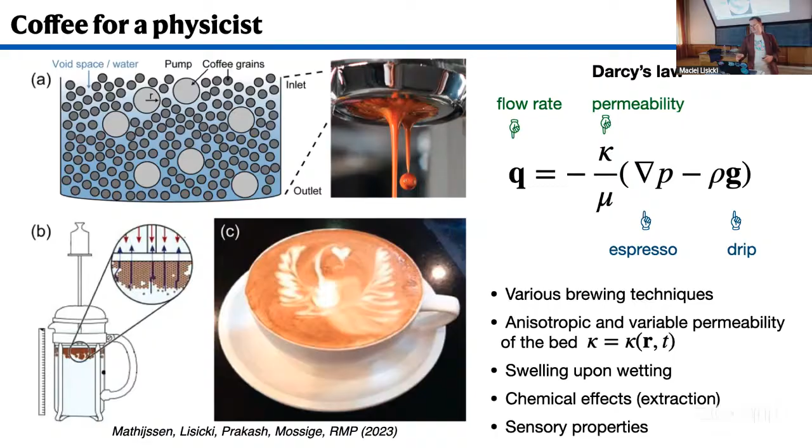What happens there chemically, that's a whole different story. But there is swelling, there are chemical effects of extraction, and that all affects the sensory properties of coffee. And the sensory properties, there's some complicated chemistry that goes into it, and I will not comment on it today. But let's restrict our attention to espresso.

So with espresso, there is a notion of a perfect espresso. How many of you are espresso drinkers? Some. So there is a notion of a perfect espresso, and the perfect espresso is a coffee that is sweet, but not too bitter, but not too sour. So there is a balance between sour and bitter, and this depends on many things, but in particular, it depends on how long you brew it.

Typically, if you brew your espresso for 20 to 30 seconds, you get something that could be called the perfect espresso, just sweet enough. Now, if you brew it for too long, you start extracting different chemicals, and that gives it a bitter or an ashy taste, and that's called an over-extracted espresso. Or if you brew it for not long enough, typically less than 20 seconds, then you have something that's under-extracted, so it has these vegetal or sour notes. So we don't want either, we want to brew it for just the right time.

Now, how do we make it so that it brews over 20 or 30 seconds? Well, to brew coffee, you need essentially 3 elements. You need coffee, your material, you need a grinder, and you need an espresso machine. And so this is a set that's necessary to brew decent espresso.

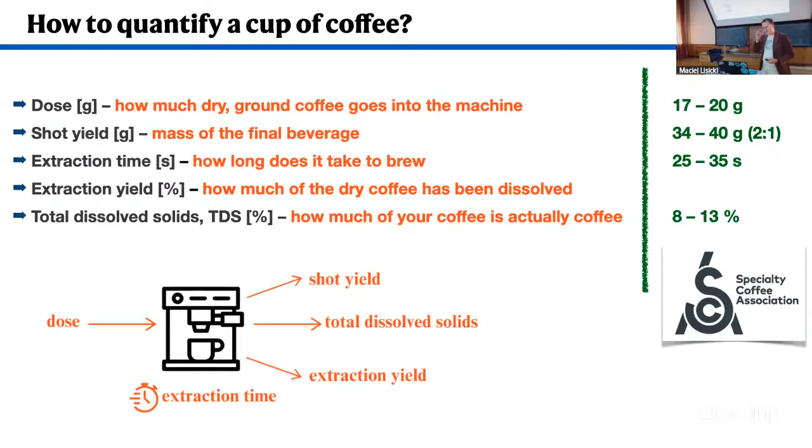Now, another factor is the extraction yield, so how much of the dry coffee has been dissolved in this coffee pot. And another parameter is TDS, total dissolved solids. So how much of your coffee is actually coffee? The amount of coffee in coffee, and that's typically 8 to 13%. So these are the metrics that the coffee industry uses to characterize a cup of coffee.

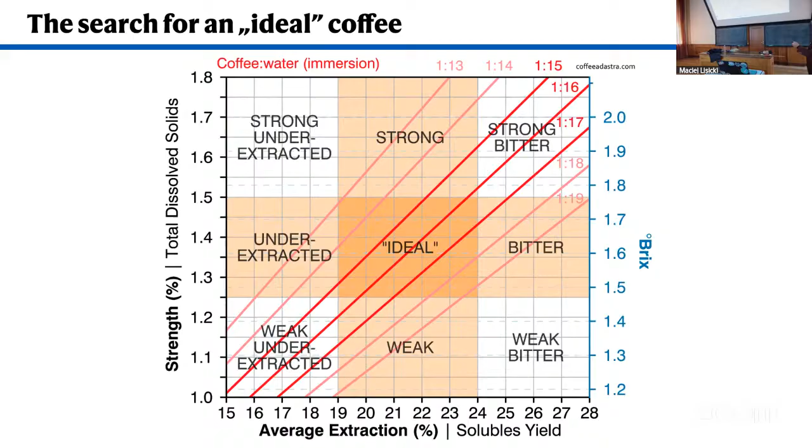Now, if you look at the diagram of TDS, which quantifies the strength of coffee, with the average extraction, so how much of the soluble substances you actually dissolve, there is a sweet spot in the middle between under- and over-extracted, between too strong and too weak. So people are generally aiming to be in that area.

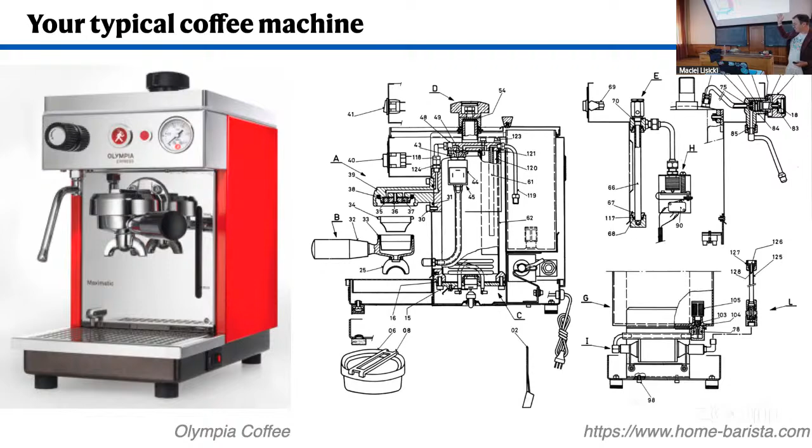And of course, this world of coffee is very much for nerds. So there is all sorts of equipment you can buy. You can buy everything made of gold and pay however much you want to pay for that. But a typical coffee machine, in fact, is not a very complicated design. Of course, this looks complicated as a technical solution, but what it boils down to is the following. So this is the coffee machine we have in our lab.

Well, it's connected to a water supply. The water goes through a rotary pump. This pump is connected to a pressure regulator. Now we have a pressure sensor connected to it. Then water goes through this flow meter. Then it goes through a boiler. A boiler is basically a big tank of water that is pressurized. It's held at about 120 degrees Celsius.

So the water that makes your coffee goes through this boiler, gets in thermal contact with this water and heats up to about 96 degrees Celsius, and then it ends up in this device called portafilter, and then it ends up in the cup. And underneath the cup we have scales, and all the data from these three we measure simultaneously using this computer and the tiny Arduino that's the scale. So this is a very simple experimental setup that we have. And so let's brew.

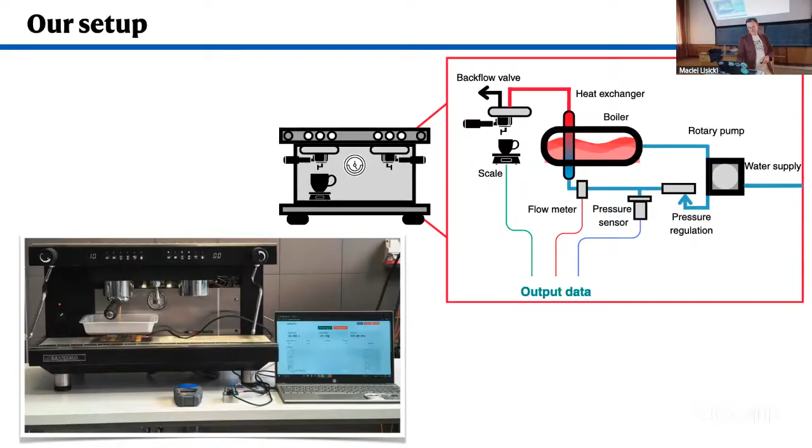Well, this is an actual photo from our lab. And the typical experiment looks something like that. Maybe you can't see that very well. So panel A is mass in the cup versus time. Initially there is very little flow. First of all, we have droplets of coffee, so the mass increases slowly. Then there is a crossover, and it starts increasing more rapidly.

Now, if you translate the mass to flow rate, which is essentially a time derivative of the mass in the cup, you'll see that initially the flow rate is small, then it increases, but then interestingly it saturates. This increase happens over about 30 seconds, and then later on it is saturated. And the pressure signal in the machine, in this case, was 6 bars, and this was consistent throughout an experiment. So what we see here, in fact, are two regions.

First is the short time regime when water infiltrates the puck. Initially the puck is coffee mixed with air. So this water has to displace the air from the porous medium and starts dissolving the coffee. So there is infiltration, there is swelling, there is displacement of air. Then finally, when there's water in contact with the coffee, there is dissolution, and finally espresso starts flowing. So this is quite a complicated regime with lots of things happening. It's a multi-phase flow, multi-scale. It's a horror to model, really.

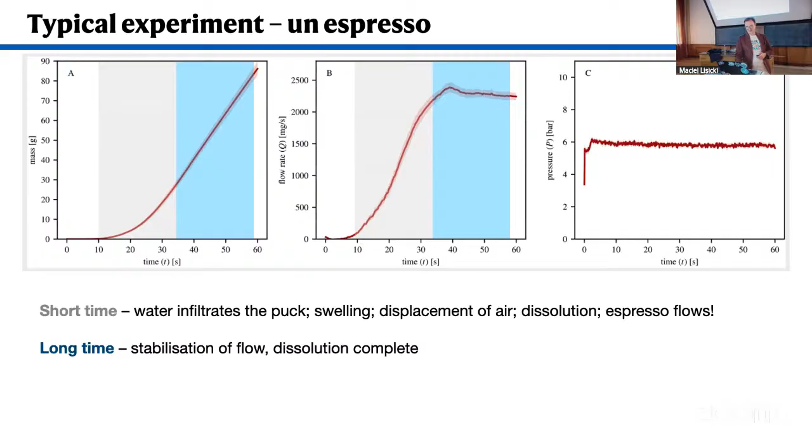So let's see. One more thing that we did is we wanted to characterize the dissolution. We wanted to understand how this material is being dissolved. So what we did, we divided a couple of coffees, about 70, that we brewed for this experiment. Every 5 seconds, we would change the cup to which the coffee is flowing. It's a horrible experiment because you have to have 12 cups, and every 5 seconds you switch the cup. And then we measured TDS, the amount of coffee in every sample within an experiment.

How do you measure the amount of coffee in coffee? Well, the brute force method is to just dry out the liquid and check what is the mass of the grains. But what you can do is an indirect method where you measure the index of refraction. With this refractometer, the index of refraction is proportional to the TDS, so you can measure TDS by optical measurements.

And so what we see is that the TDS changes in time like this. Initially we have very concentrated coffee. The first drops of coffee, and you can see that in the machine, are very dense, very dark. As you wait, this intensity decreases. And finally, after the 40th second, you dissolve very little. The mass of coffee in coffee is negligible here.

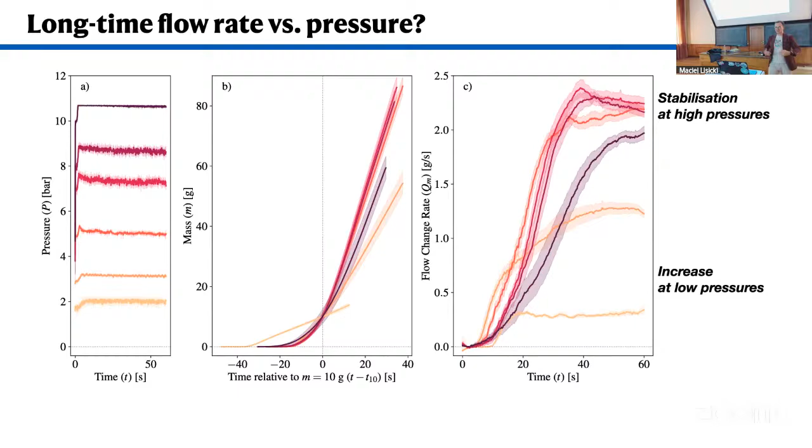But then if you increase the pressure even more to like 12 bars or 11 bars, then you get this curve. The final flow rate is actually low, which is surprising because we would expect from Darcy's law that the higher the pressure gradient, the larger the flow. So there's something interesting going on here.

In fact, if you measure this saturation flow rate for different pressures, you find that at low pressures it increases, but then at pressures of about 6 bars it saturates, and maybe even goes down a little if you increase the pressure. This was the first moment where we thought there's something interesting, because there's definitely not Darcy-like behavior. The linearity is maybe there for low pressures, but definitely not at high pressure.

At the same time, you often see advertisements of coffee machines that say this machine is capable of producing 20 bars, 25 bars. So is it true that the higher the pressure, the better the coffee machine? Well, this shows something different, that at some point the pressure stabilizes the flow rate. The conjecture is that at low pressures maybe we see a Darcy-like flow, but at high pressures we see the saturation. This is something we wanted to explain. One idea we had is that coffee is in fact a porous medium that is not only porous, but elastic as well.

So what I mean by that is that if you induce a pressure gradient in coffee, in this porous coffee medium, well, then the pressure gradient will induce stresses. The stress will cause deformation. So stress will cause strain, and this deformation will change the porosity of the sample, so how many pore spaces are within this ground coffee. Now, this porosity affects permeability, the material characteristic of how permeable the material is to flow. And so this in turn will affect the flow rate.

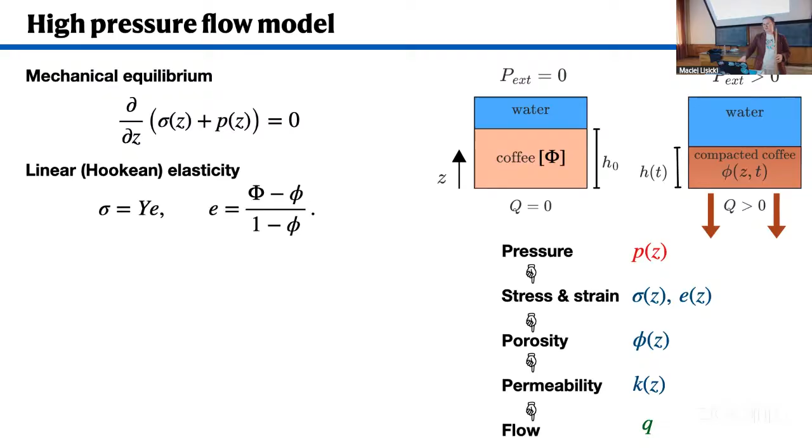So writing the equations of mechanical equilibrium, a well-known concept from the theory of elasticity: under a stable pressure gradient, this compacted coffee is in equilibrium. Then assuming that stress and strain are related by a linear relationship, where Y is the effective Young's modulus of the coffee. Then we need to relate the strain, so the deformation, with the porosity. And this is the relationship that relates them.

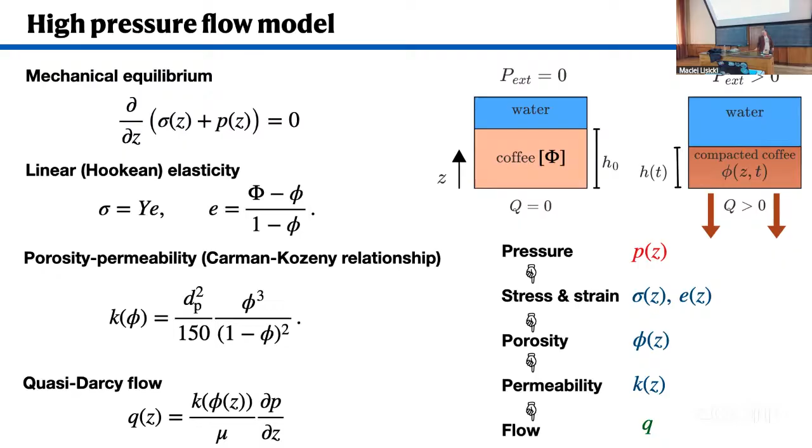Now the porosity is related to permeability by the Kozeny-Carman relationship, another empirical relationship that people use to describe porous media. And finally, the flow rate is related to permeability and the pressure gradient by Darcy's law, but this Darcy law now has a permeability that depends on the porosity, that depends on the deformation, that depends on the pressure. So the flow is proportional to the pressure gradient, but also to something that depends on pressure in a non-trivial way. Okay, and so this model can be solved.

Exactly. And if we get a model, we can compare the model with our experiments. This is what the model predicts: for low pressures, we have an almost Darcy-like, almost linear increase in the flow rate, but at higher pressures of about 6 bars, the flow stabilizes.

So this leads us to the conclusion that perhaps we understand what's going on here: at low pressures, when the pressure gradient is not too high, this porous medium behaves like a Darcy medium, but at higher pressures, compaction happens, and the high pressure is compressing the pores and decreases the permeability. Now, this is all in the long-time regime, when everything that we could dissolve is already dissolved.

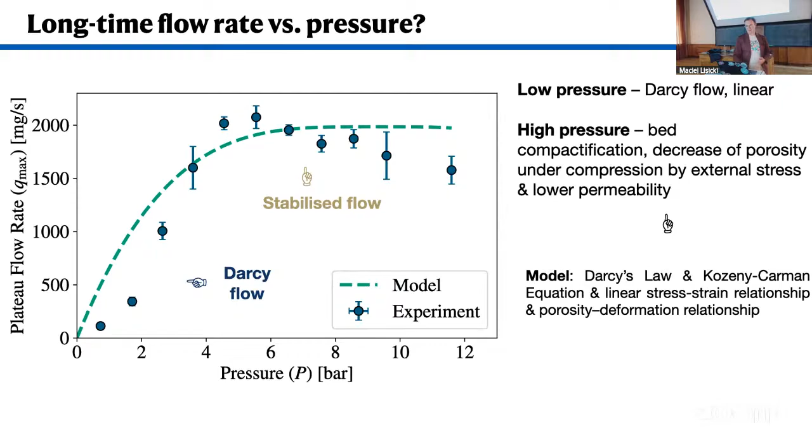In the short-time regime, it's more complicated because at the same time we have dissolution, which removes material from the coffee, so it opens the pore spaces, and this compaction, which closes them. So there is a competition that goes on during dissolution, and this competition leads to structural changes in the coffee puck.

In coffee, this phenomenon is known as channeling. And channeling is really bad for the coffee, because you get the flow rate that you would expect, but the dissolution is very low, because most of the fluid doesn't dissolve the coffee but instead goes through these channels. So in the case of coffee, how can you see this channeling?

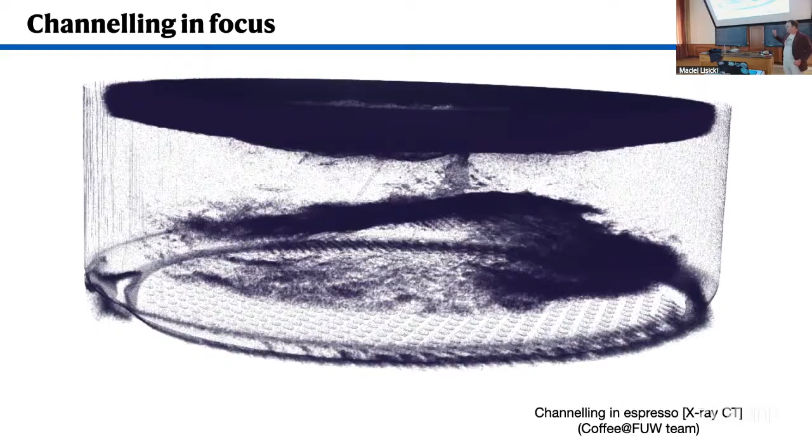What we did is we took a coffee puck after brewing and put it in a CT machine. So we did X-ray imaging of this coffee puck, thanks to the fact that in the physics department we now have a CT machine. This was, I think, the first photo in the world of a coffee puck in a CT machine. White areas are where coffee is, and dark areas are where the pore spaces are. There's a 3D reconstruction here. So this coffee has definitely channeled.

This is already after brewing, so this is empty space. So what happened here is water found this channel here, and it spread over the coffee puck. And then finally, well, it seeped through the bottom part of the coffee cake. So this is an example of what is undesirable in coffee.

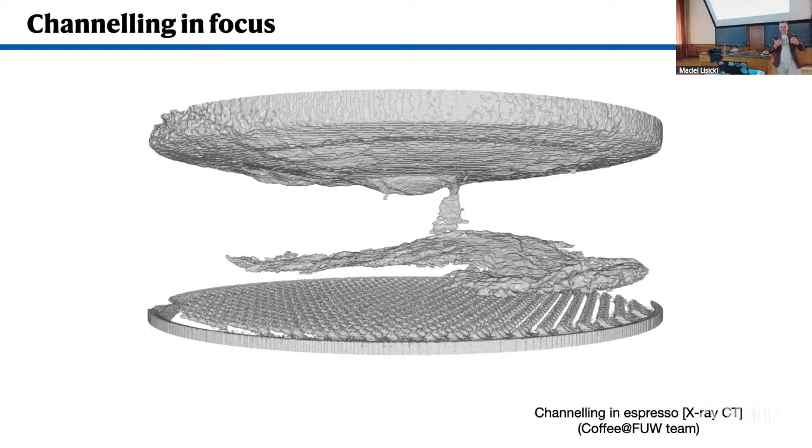We want to avoid it, and the way to avoid it is to make your sample as homogeneous as possible, because every irregularity, every change in porosity, every distribution of porosity might lead to the formation of channels. And that's why we pay so much attention to homogenizing, mixing, and shaking this coffee bed before we make the coffee, so that this doesn't happen.

Another way, well, now that we know that this channeling happened, we wanted to understand how does the coffee, this porous medium, move, or what happens during the brewing process. And it's hard to look into it because it's closed in a metal box during brewing. Metal boxes don't really image well with X-rays.

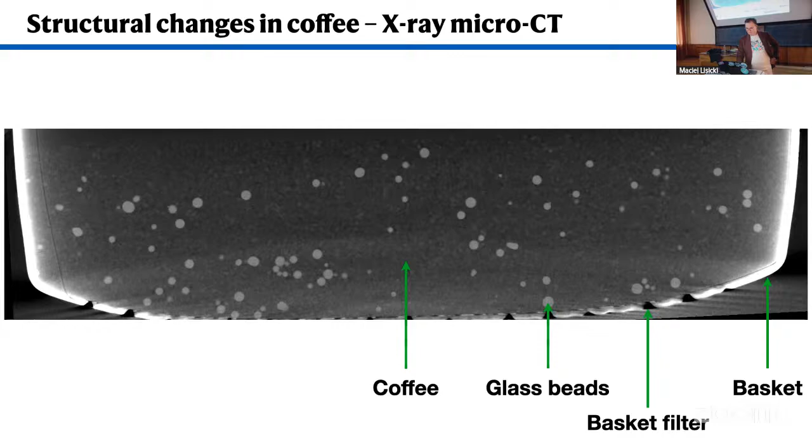So what we did is we did the before and after, but we added some tiny glass beads of the size of about 50 to 70 microns. So we added these glass beads to coffee, and so this is X-ray microcomputed tomography before brewing. So we note the positions of these glass beads, and then this is after.

So what you see here is that after brewing, there's different contrasts, but essentially after brewing, there are these cracks that appear, and these cracks cause the sample to be less homogeneous. Now, what we want to do, and what we are in the process of doing, we have three-dimensional images of before and after, and we know where the glass beads are.

So now the job is to correlate the positions before and after, so that we get a displacement field, and we know which parts moved during brewing and in what way. And so this is one of the works in progress in our lab. But this shows us another thing.

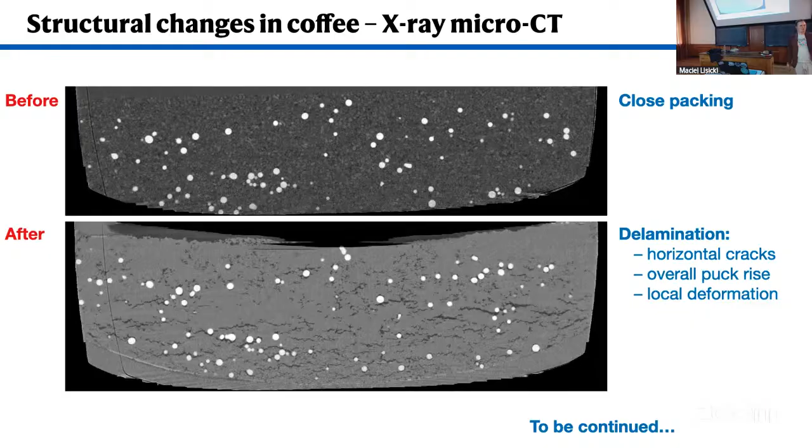So if this is before and this is after, maybe you have this experience of making coffee in a coffee machine where you turn the machine on, you start brewing, then you turn it off, and then you decide, no, maybe you want a bit more water. So then you turn it on again. So if you do this repeatedly, this is what happens.

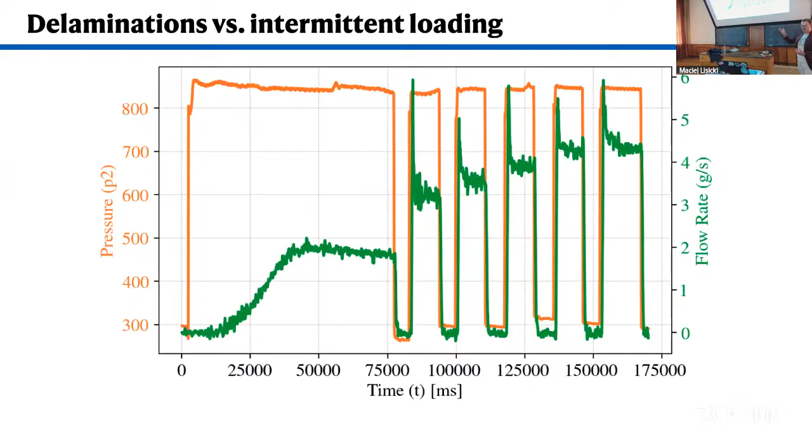Okay, well, perhaps you are not fans of espresso. Maybe someone likes a moka pot coffee. How many people like it this way? Okay, there's some fans. Well, what can you do with a moka pot?

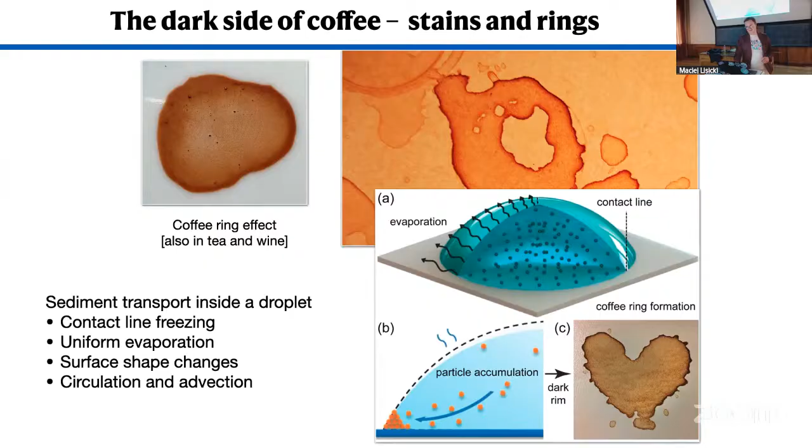Okay, and this brings me to a slightly wider topic of gastrophysics. So all the fluid mechanics that's related to food, which is something I find very interesting. And the result of the pandemic for me and my 3 colleagues was that we wrote a review paper on culinary fluid mechanics and other currents in food science. And because it was a pandemic and we had too much time, it grew uncontrollably to over 80 pages and 1,000 references. So we put a lot of time into it, but at the same time, it was very much fun. And so if you're interested in the fluid mechanics of food, check it out.

We structured it like a menu. So as with a nice dinner, you start off with kitchen sink fundamentals. So all the rules of fluid mechanics and all the laws that we might need to understand what's going on. Then we start with a drink or a cocktail, which is an excuse to talk about multiphase flows.

And once we've had a couple of cocktails, there comes a soup starter. And soups are typically complex fluids, so not all soups flow like water. They might have more complex internal structure. They might have polymers, which make them respond in a nonlinear way to forcing. So we talk about complex fluids. Then it's time for a hot main course, where we discuss thermal effects, which always have pronounced and lasting consequences for kitchen flows.

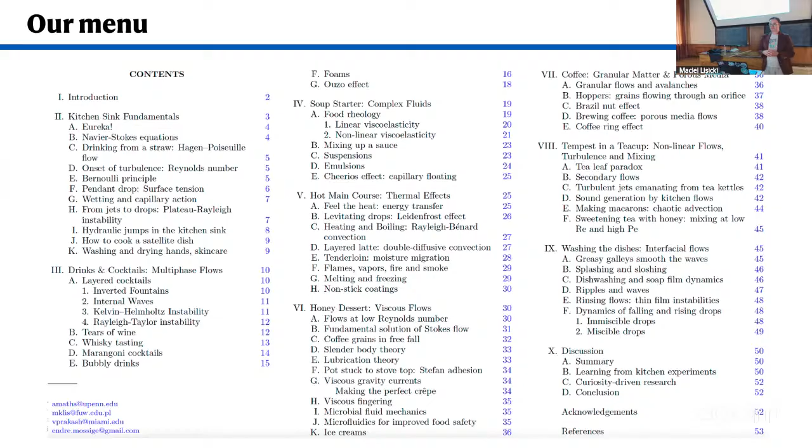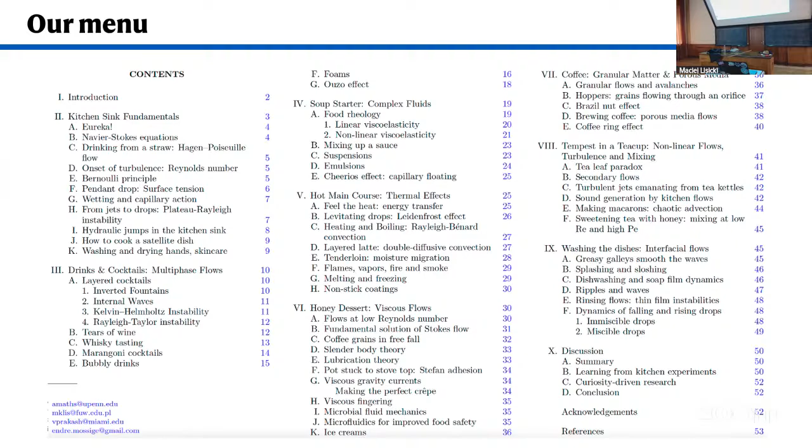And after the main course, it's time for a dessert, and desserts are often viscous, like honey. So we talk about flows at low Reynolds number, and how such flows can be used to understand the fluid mechanics of sweet desserts. Then we talk about granular matter and porous media flows using coffee as an excuse. Of course, if coffee is not your thing, then maybe you're fans of tea, and tea is related to turbulence mixing.

And after that, someone has to do the dishes, but maybe it's not that bad, because then we talk about interfacial flows and what happens when surface tension enters the game.

And so all of that would not be possible without a wonderful team of people. So in particular on the coffee project, the team of Rados, Pranek, Marysia, and Łukasz. These are all students in my lab, as well as colleagues from the physics department, Michał and Piotr. And now this paper that summarizes our findings is in print in Physics of Fluids, so it will be out very soon, but the preprint is already on arXiv.

And again, it would not be possible to fund all that without our industrial partners, Coffee Lab, a Warsaw coffee roastery, and the Polish company Coffee Machine Sale, who distribute coffee equipment; these things tend to be rather pricey. And the National Center of Science is not keen on financing these initiatives yet, but maybe soon, once we have some papers published, we will ask for

further support. Now, it might sound funny, but in fact, this coffee business is an excuse to talk about rather complex flow phenomena. And there's a couple of questions that emerged from this study that are really serious scientific questions about the nature of multiphase flows that incorporate both dissolution and structural changes in fluids. And these are more prevalent than only in coffee.

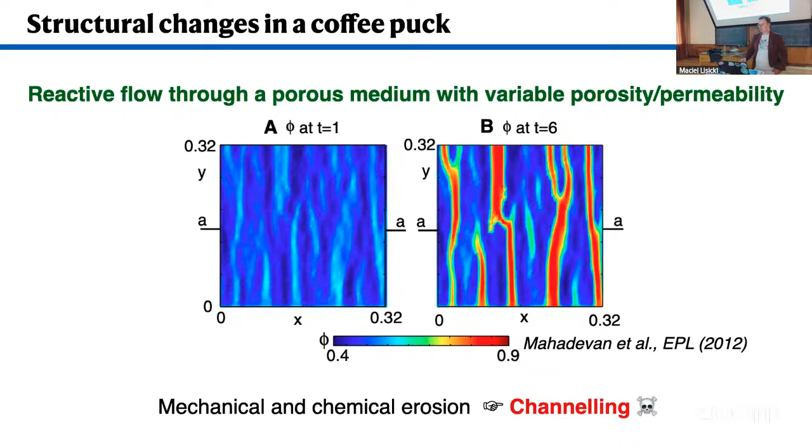Now, this is just for one pressure. I would love to have that for multiple pressures. I don't have these measurements yet. If I find interested people, we'll do it. But I think we brewed something like about 300 coffees to have the measurements that went into this paper.

And it happened during one session, or no, during multiple sessions. So as with many scientific research adventures, we were learning on the way how to make it better and better. And so when we finally learned how to use our coffee machine and how to make the measurements, this took just maybe 3 days to measure everything. But it took us 2 years to figure out how to do it. I mean, it was not our main project, but

it received intermittent attention. But yeah, so the amount of coffee that we used was about 300 coffees that we brewed. In kilograms, for all of that project, I think we were in the range of 20 kilograms.

Did you invite the faculty to come by for a free coffee during the experiment? Of course we did.

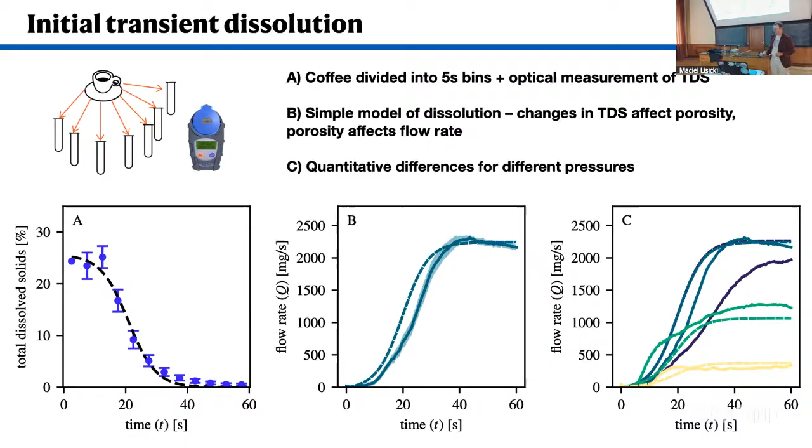Of course we did. Now, if we brew this coffee that is longer, if we're interested in this long time flow regime, this coffee that you brew for 60 or 80 seconds is not that tasty. So that's the one that you give to the other people, right? So the long time flow, yeah, I'm not a fan. We used to have a big bucket where we would just pour in coffee after measurements, and I once tried coffee from that bucket. Not a good experience. Is the end of the Darcy curve the best moment?

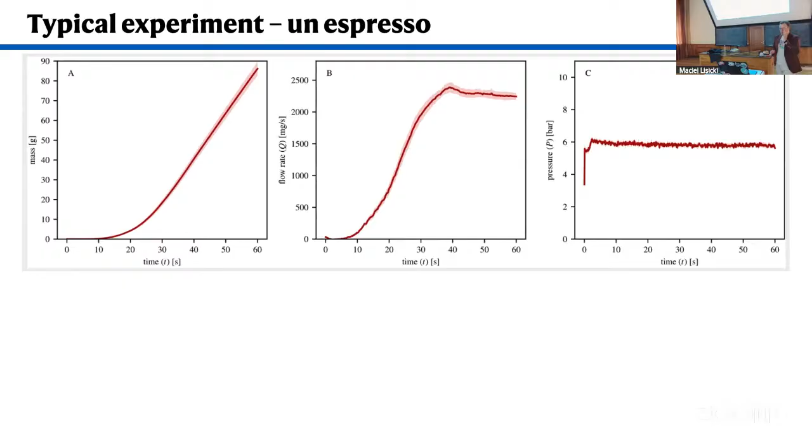Well, that's a very good question. This curve, it so happens, coincidentally, that this is the typical pressure at which most machines operate, 6 to 8 bars. So whether it is the best moment, I would say it's a sufficient moment. You don't need more pressure to get decent extraction.

Also, one of the things that got us into this research was that coffee has this religious aspect to it. So many people love it, many people talk about it. There are internet experts, there are YouTube gurus. People say various things, but they preach that you should do this and you shouldn't do that. You should have this water and not that water. And so at some point, there are claims that are completely unsubstantiated.

With this poroelastic response, there is one internet guru who once said that this compaction of coffee is an important effect. He never provided any evidence for that. I think this study is the first evidence that this compaction actually happens. It's the first time that someone has measured it and isolated this physical effect. And so, yes, definitely from that we conclude that 6 to 8 bars is a good brewing pressure, and we don't need 20 bars to brew decent coffee.

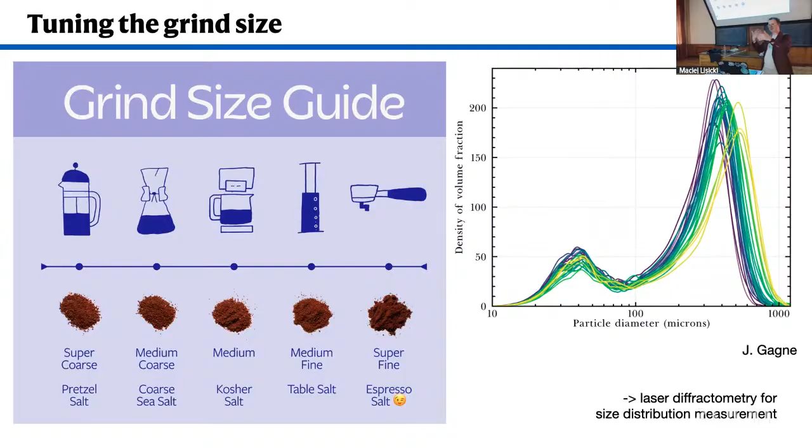Another question, please. So the coffee taste depends on the brewing time. Is it because different chemicals have different solubilities in water, so they dissolve differently? Yeah, something I was completely silent about, but it's a very important part of brewing coffee, is that all the different chemicals dissolve at different times, and a bit of that is in this concept of brewing time, that you start dissolving these bitter notes if you brew for too long.

So definitely. Now, of course, different coffees come from different origins, and you prepare the beans using different methods. So there's the dry method, natural method, the washed. So there's different ways in which you can prepare your coffee pre-roasting, and this affects, of course, the taste, so all the chemicals that are there. This is a super complicated topic. Thank you.

What about the roasting temperature? So it's not only a temperature, it's a profile. These roasters are like preachers. They know their machines. I think generally if you like light roast, which is not the Italian espresso, but rather Scandinavian, it's called third wave now, these roasters roast it to the so-called first crack. So when you're roasting your coffee, it starts cracking at some point, and this is where you stop the process. But then people are experimenting with different profiles, like you increase the temperature first and you decrease it later. And so I think this is like making wine. It's the winemaker's secret how to make it perfect.